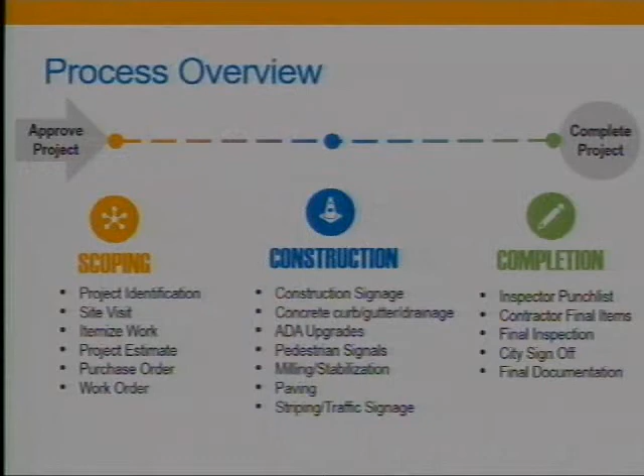We'll keep with the same process overview — we'll have our sliding scale down at the bottom and go through the different phases of construction. The first project I wanted to go over was our Santa Fe project, Southwest 44th to Southwest 29th.

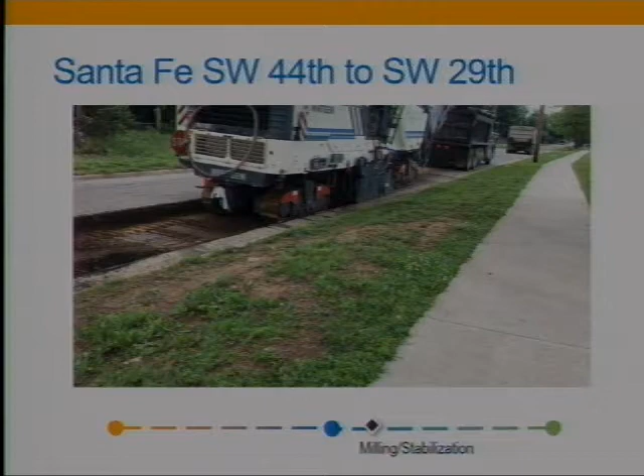Here's a little video of them doing some milling, and you can tell they're taking out a lot more material. Usually we have just a 2-inch mill and overlay, so we take about 2 inches of the top surface — typically that's where all the oxidation and issues have come about. Our intent is to mill that 2 inches off, get into a fresher layer of asphalt, and then overlay that material.

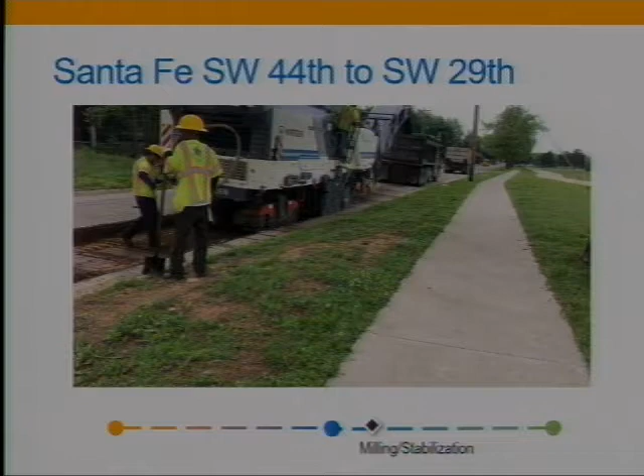In this one, they were doing a full depth patch, and they do that a lot of times. They'll take the mill, and if we've designated that area as a problem area, we'll do a full depth patch, using that full depth mill to go down to get into some better surface, then build that up with asphalt and finish it off with the final layer. So that project is progressing along.

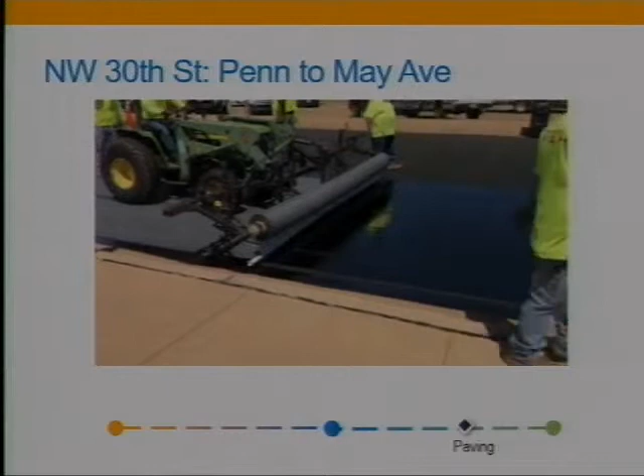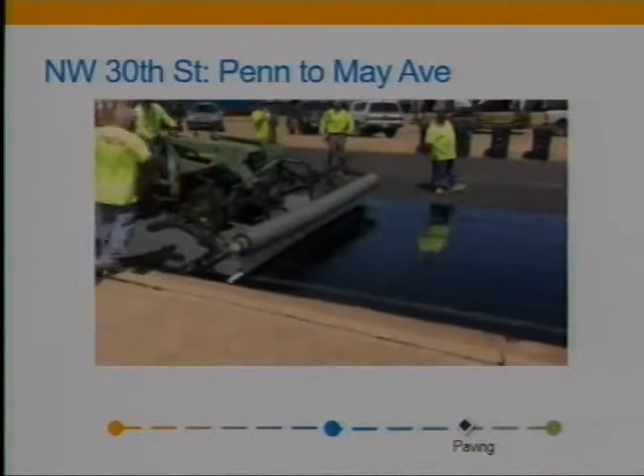Our next project here is Northwest 30th Street, Penn to May. This quick video shows them using an interlayer, a non-woven fabric with a grid in it. A lot of times when we mill off that 2-inch surface and we still see some of the cracks and things going on, we obviously address those cracks.

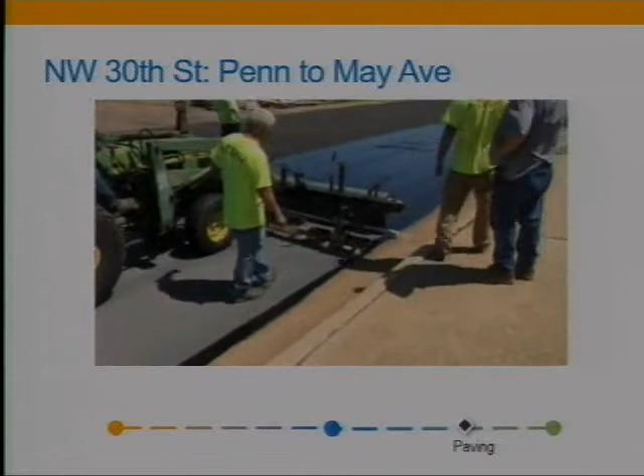If it's a large-scale crack that comes from the bottom all the way to the surface, we'll dig that out and address it like a full-depth patch like we showed in the previous slide. But a lot of times when we still see some of that stuff, we address it with a crack fill material or crack seal material. Sometimes if it's real thin, we'll use a rubberized asphalt to put in there. And if it's large enough, 2 inches or so, we'll actually clean it out and put asphalt material in there.

A lot of times if we feel like we need to, we'll put an interlayer, or this grid system, in between those layers. The main purpose of that is to help with reflective cracking as it comes back up through the surface. It's a great tool that we use quite a bit, and that's what I wanted to show you there.

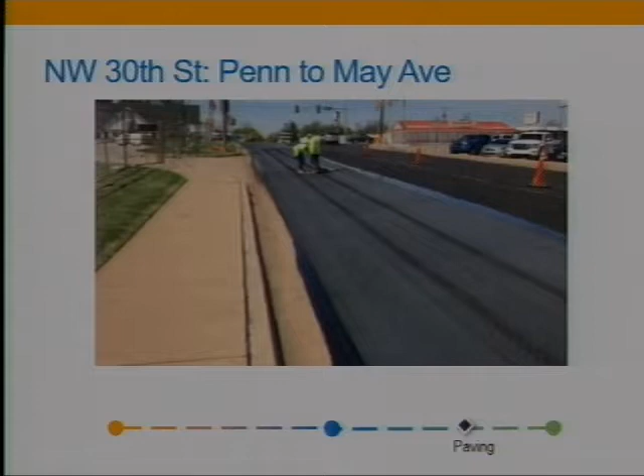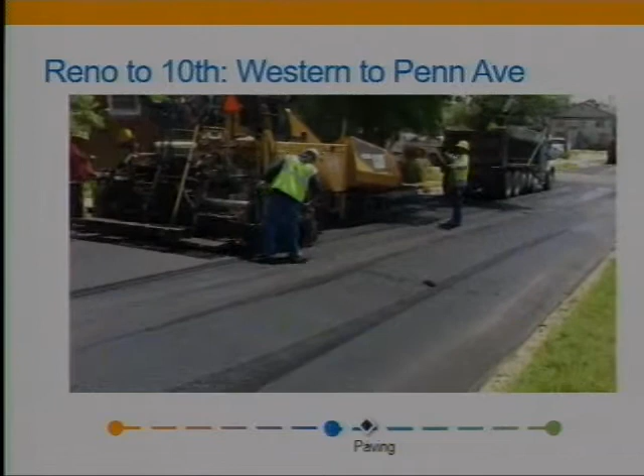Our next slide is one of the residential resurfacings here, Reno to 10th, Western to Penn. This video just shows the grid system. It doesn't have the fabric layer that connects it, it's just the grid, and you can see where they've laid that. It comes in 5-foot strips, so they have to do some overlapping there.

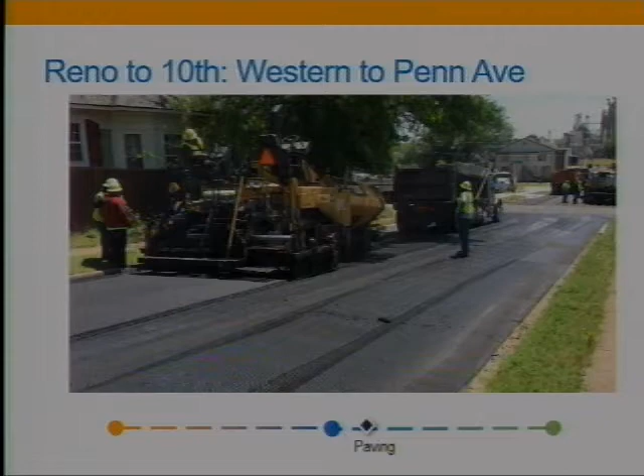This just shows the ease of doing an asphalt overlay on that, and it will help with that reflective cracking coming up through. A lot of times this is a little stiffer material, so most of the times when we use just a grid like this, more times than not, we use that over concrete. If an older street has been overlaid before, when we mill that off and get back down to the exposed concrete, we'll usually do a little leveling course to smooth things out, and put the grid type system over that, which really helps.

Next project is our Southwest 89th Street, Santa Fe to Western. In April, I showed some videos and clips of the concrete, the curb and gutter, and the inlet repairs. It goes to show, the sooner we get that done, the faster we can get to the mill and overlay portion of the project, and this is just a good picture of the finished project. It looks like on that picture we're right there at Santa Fe, looking towards Walker.

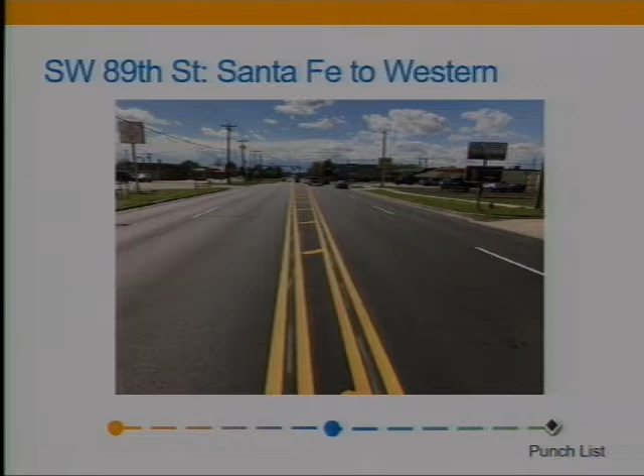My next slide is the Northwest 36th Street from Penn to Western. In previous board meetings I've shown the portion of this project that was the asphalt, the mill and overlay portion through the historical district, and I had always said that it had both concrete and asphalt, so I thought I'd get the picture of the concrete portion here at the approach slab coming towards Western, and I wanted to show that.

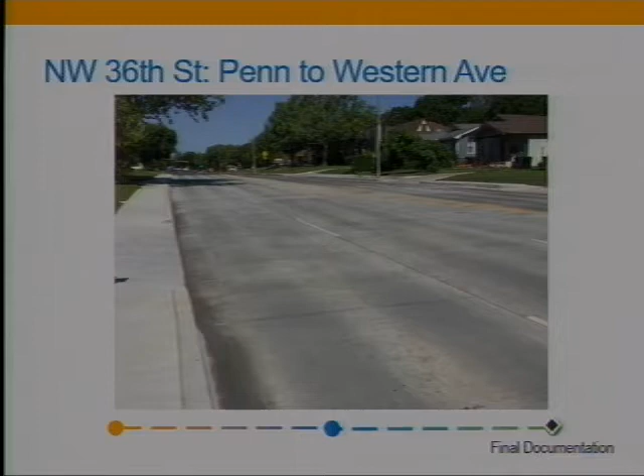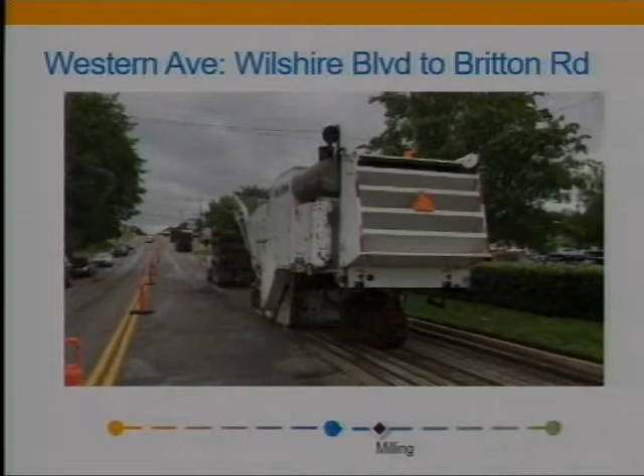Here's a quick video of them milling. It shows the traffic control that's gone on to the left to move all the traffic over to one side. This is one of our larger stretches where we have 3 miles teamed up, going from Wilshire to Britton, Britton to Hefner, and Hefner all the way to 102nd. This is the Wilshire to Britton section, and they are milling on that.

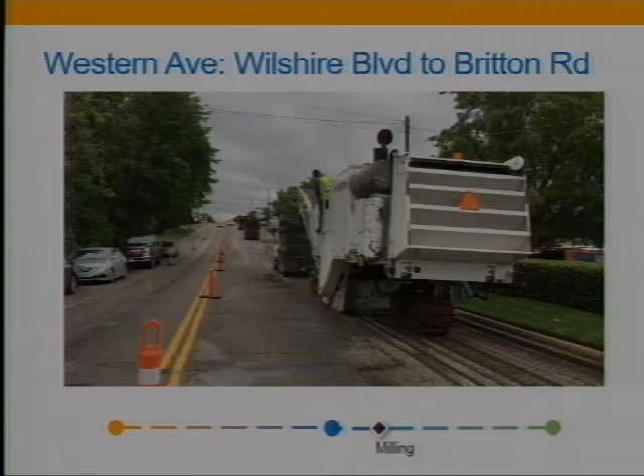Our next slide will show some paving going on. It's just a quick video of the paving.

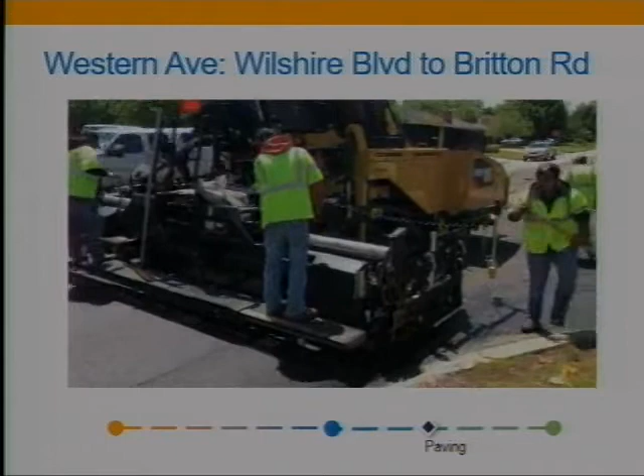Just shows the complexity there. People are scrambling around, moving. It's an intense process, and a lot of times it can become very labor intensive when they do that.

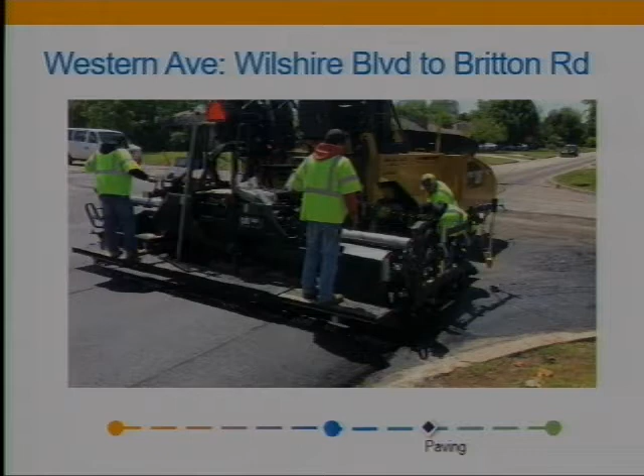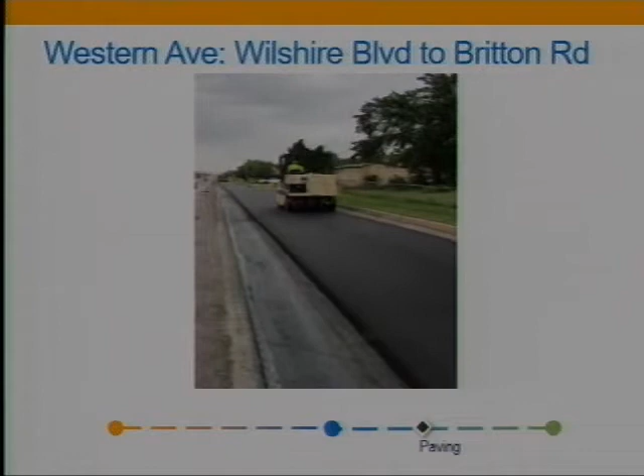We did use the interlayer, and this is just a quick video of them using the pneumatic roller and compacting the asphalt. I really wanted to show that for the interlayer we talked about earlier. We did use that on this one, so it just kind of shows it there.

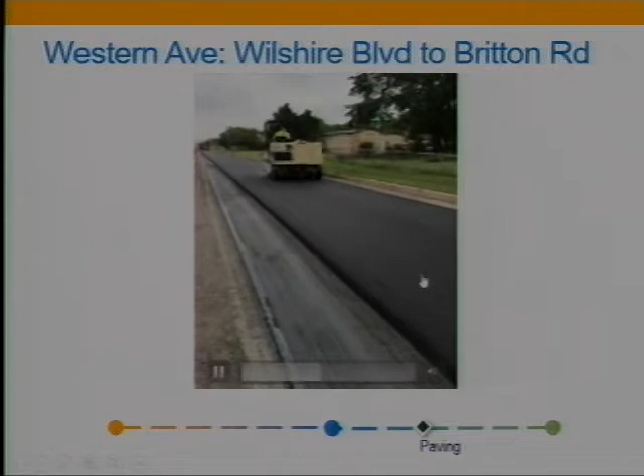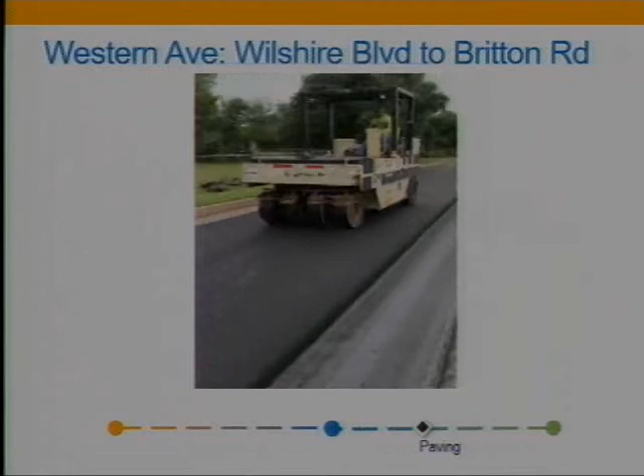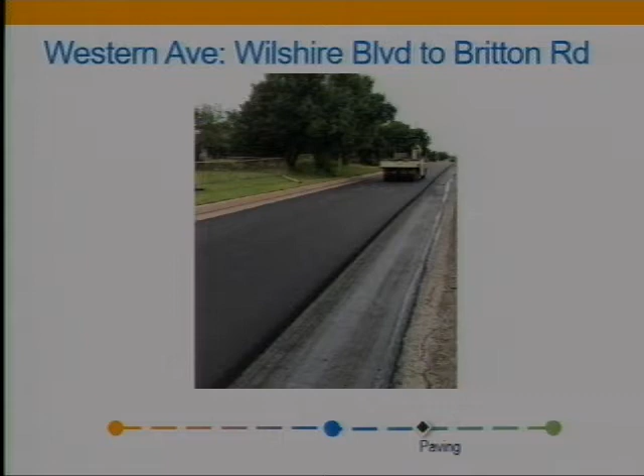It doesn't look like much, but a lot of times they work to get a different pattern. When they lay that asphalt, they work to get different roller patterns because they're trying to reach a 95% density compaction that they have to meet the standards. A lot of times they'll be right at 94%, so they'll change a couple things, and testing labs will come out and work with different rolling patterns. It looks pretty simple, but sometimes they can make it pretty complex.

This is a neat slide. It shows another tool some of the contractors will use. It's a huge help for productivity. They call it an MTV, a material transport vehicle. So instead of the paver accepting the asphalt truck coming in directly, this piece of equipment will catch that truck.

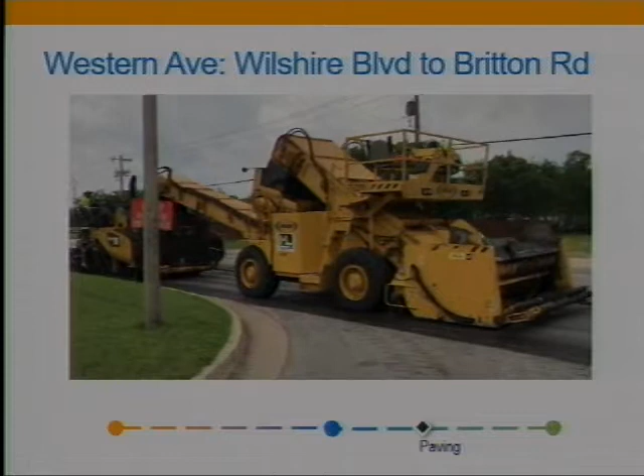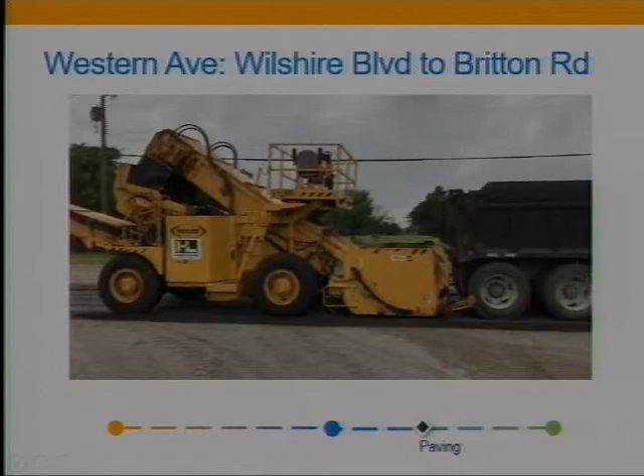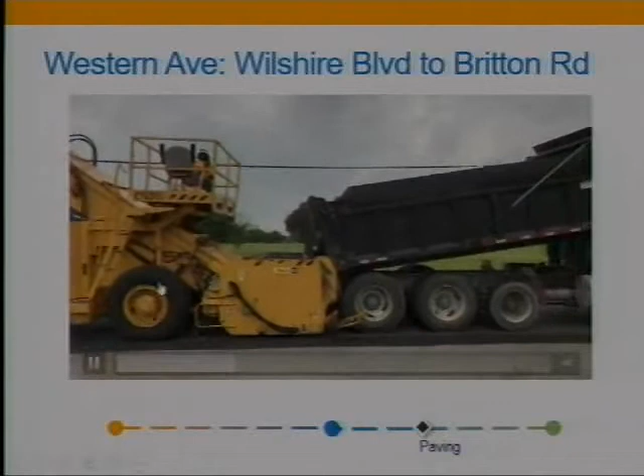The biggest thing is it helps receive that truck and get things moving. It has a larger hopper than most pavers do, so it gets that material in, and it actually has a conveyor that will convey the asphalt into the hopper of the paver. It helps the paver never have to slow down or catch that truck and get that bump. It usually smooths out the asphalt, and it's huge for production when they can do that. If they're able to get that piece of equipment out there, it's kind of expensive, but when they use it, it's a big help for production and really helps with the ride quality.

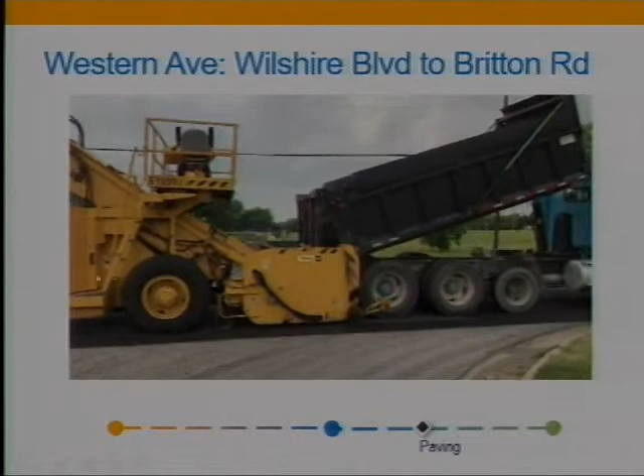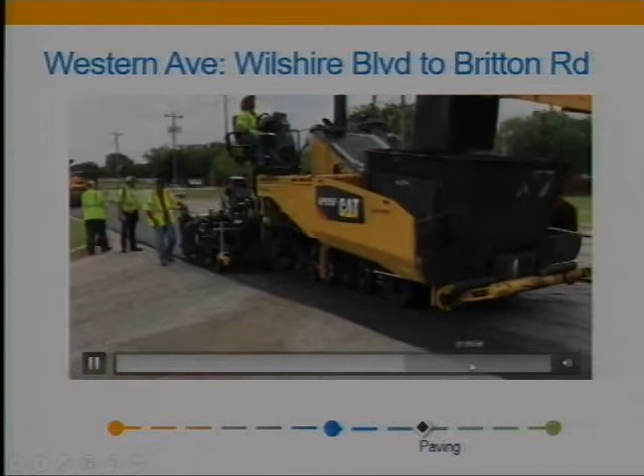It's kind of a long video, but it shows it feeding into the hopper, and then the asphalt pavement machine just keeps moving right along.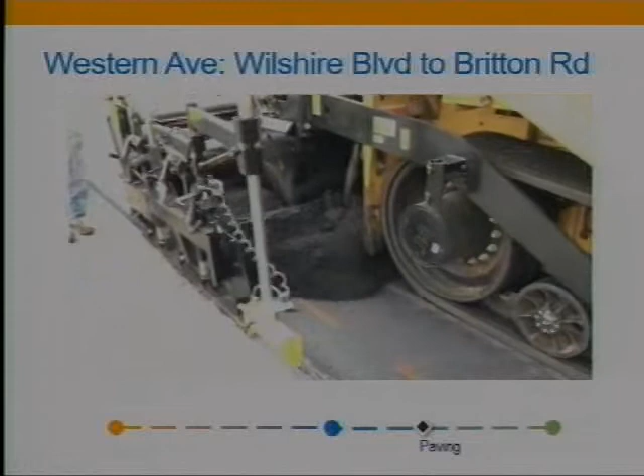Here's another one of our projects that we got started between our last meeting and now. It's the I-240 service road between Penn and Western, both sides of the service road. It shows our typical process: first we do inlet repair and concrete curb and gutter work, then some ADA handicap accessible ramps with the newest pedestrian push buttons that talk to you. That's usually the first step right before the mill and overlay portion.

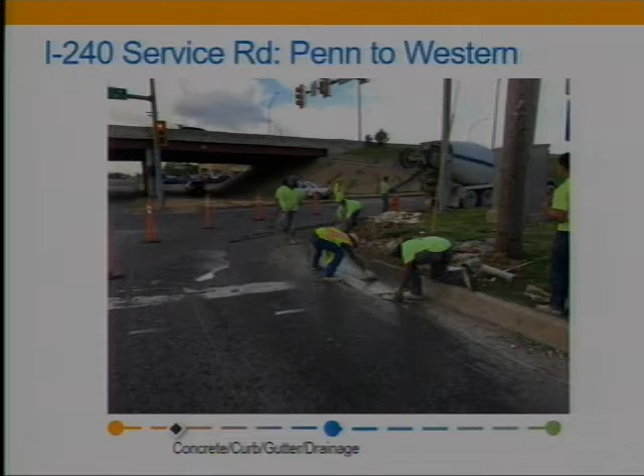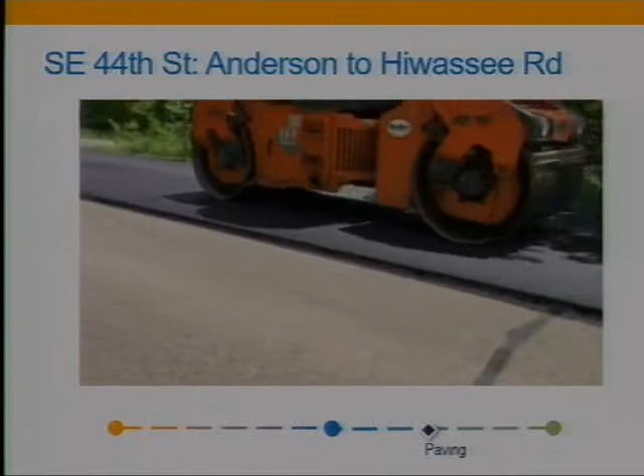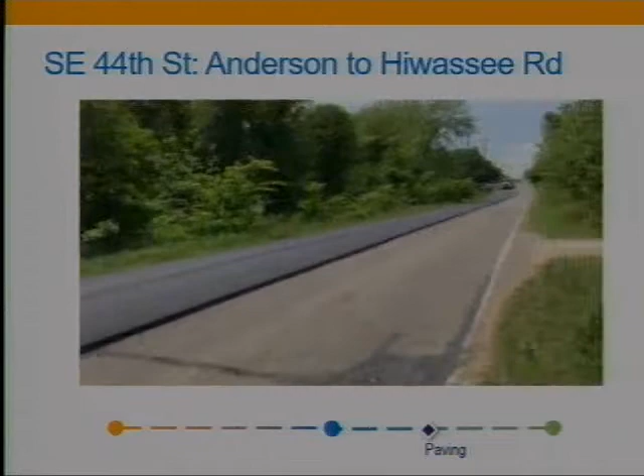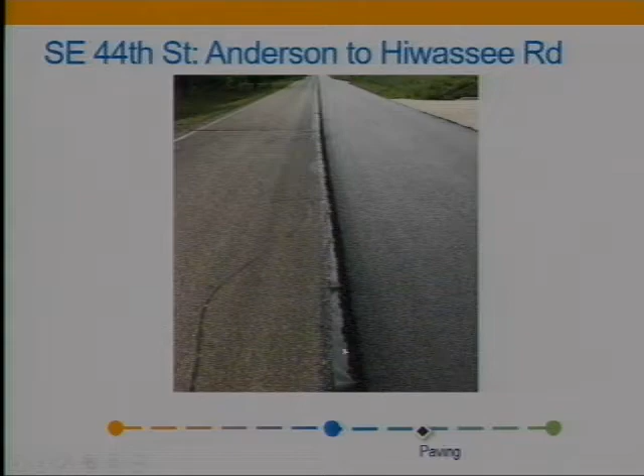Here's another project on that county road where we just did an overlay instead of a mill. I wanted to show Southeast 44th Street, Anderson to Hiawassee. It shows we addressed those cracks with crack seal material, and as long as everything's structurally sound, we'll try to overlay it to add structure. We did use the interlayer—you couldn't really see it in the picture, but it clearly shows that interlayer we used on that road too.

Here's Sterling Canyon, Southeast 164th to Air Depot, another one of our residential resurfacing projects. It shows the gutter work—we call that a ribbon curb. It's a little different than a normal 6-inch barrier curb with the gutter pan; it doesn't have that 6-inch barrier, just the gutter portion, but it really helps confine the asphalt and is good in areas with drainage issues. We try to do as much of that in the neighborhoods as we possibly can.

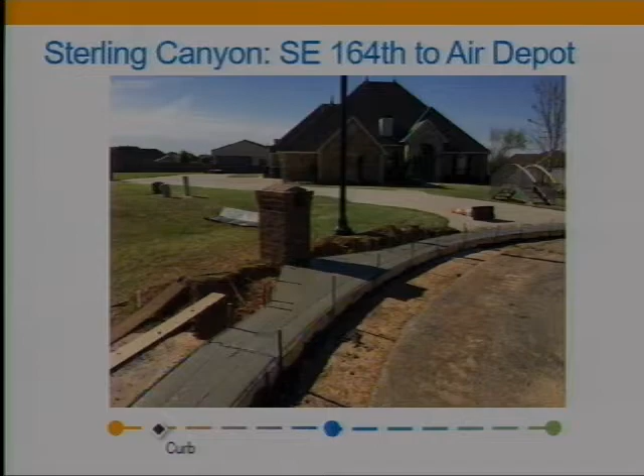And that kind of wraps up my show and tell there. If y'all got any more questions.

Mark, I have a question. You said the City Council has approved 21 of the street resurfacing projects. Correct? Yes, correct. Whenever that project is finished, we have a 1-year maintenance bond that the contractor is responsible for, so we take that to City Council for final acceptance, the final budget, and it also places that 1-year maintenance bond into effect.

For our new board members, would you just briefly go through the 2 types of street projects that we have and how the rating system works? The prioritization method? Yes, sir. Oh, man. Absolutely, no, it's a key process that we have.

We have a pavement management program system, and for us to evaluate that, we try to—with all the streets, there's about 1,300 arterial streets that we have—we plug that into the program and use a prioritization method.

So some of the key things we look at—sorry, it's a complex process, but the main things we're looking for is the ADT, which is the average daily traffic. Some of the rural streets we may have 2,000 to 5,000, but some of the inner more urban streets can have up to 25,000 to 30,000 average daily traffic. That's a key component, because if a street's only seeing 5,000, hopefully it will last a little longer than that street seeing 30,000 average daily traffic.

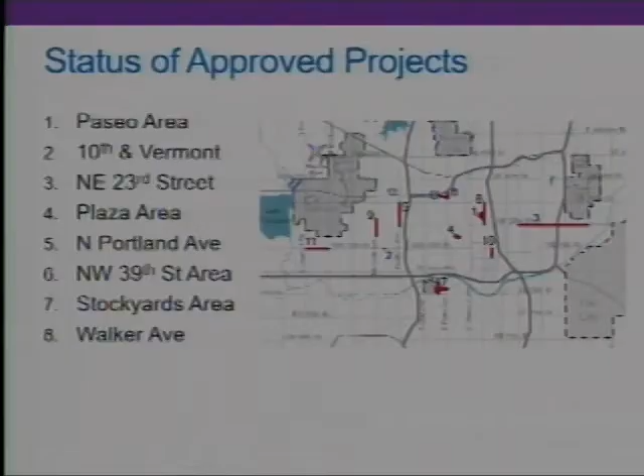The status of these projects: the Paseo project is in negotiations. The 10th and Vermont project, a traffic study is being conducted right now on that project, and CEC is the consultant for that one, and they're on an on-call contract.

The Northeast 23rd Street project is in coordination with the council member, and we're looking at preliminary scoping for that project. The Plaza area project, we are working to coordinate with the Utilities Department on that one. There's a water main through that area, some water utilities that need to be coordinated, so we're slowing that one down and working with them.

The North Portland Avenue project is in negotiations for contract design, and the Northwest 39th Street area project, the design contract with Johnson and Associates is going to council tomorrow.

The Stockyards project is in negotiations also, and the Walker Avenue project is in negotiations. And so the 4 that are in negotiations, the Paseo area project, the Portland project, the Stockyards project, and the Walker Avenue project, those we expect will go to council within the next month.

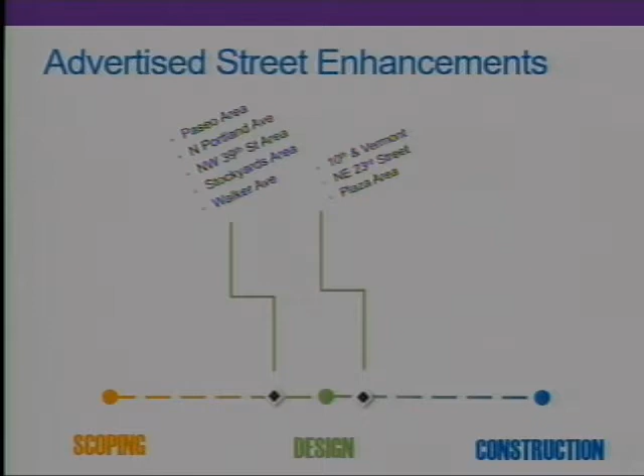And then the Meridian project and the Northwest 10th project have been assigned to Atkins, the on-call consultant, and they're currently generating the proposal of work. And then the Auto Alley project is in preliminary scoping in preparation for advertising.

Are there any questions on the street enhancement projects?

Okay, so next I'll be discussing item 3C, sidewalks status update.

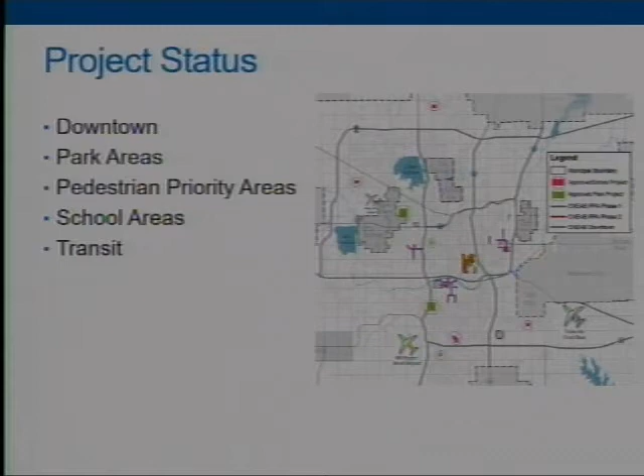Just a reminder, we have identified projects by priority areas as defined out of Bike Walk OKC. The downtown area is a priority area, and then there were parks areas, pedestrian priority areas, school areas, and transit areas identified. CEC is the on-call consultant for these projects, and they've been steadily working.

For the downtown area, just a reminder for our new board members, we allocated $1.2 million, and 100% of that has been approved. These projects are currently in the scoping phase. A list of areas have been identified, and a map has been provided to the consultant for areas for them to focus on, and they're currently reviewing those.

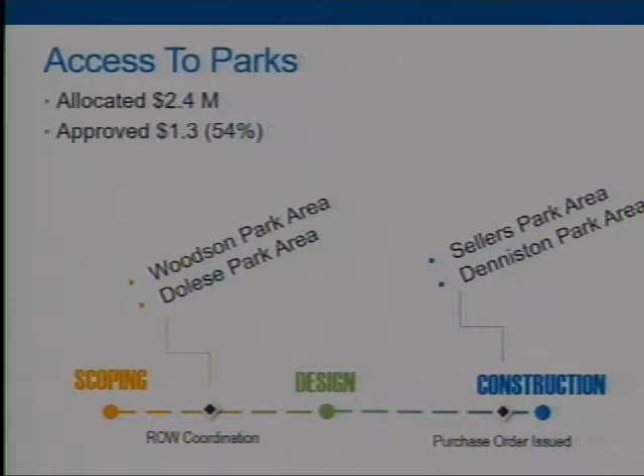Access to parks, we allocated $2.4 million, and about 54% of that has been approved at this time. That includes 18 project locations and about 3.26 miles of sidewalk. Currently, Denniston Park is about 90% complete, and Sellers Park will start once the Denniston Park area has been completed.

And we've got a picture here that Brock will explain. Yeah, we have a little picture here, just wanted to show a few more pictures. Here's Denniston Park, and it shows the complexity - as they take that sidewalk through, one of the big challenges is the driveways, with the cross slope having to be a minimum or maximum of 2% cross slope. Most of the drives we run into are greater than that 2%, so it leaves us having to fix those drives.

This is a good picture because you can kind of see the focus of attention they have on the driveway there. It's shaded in a different area because you can tell he's really trying to focus to maintain that 2% cross slope. So it's a challenge, but it really turns out to be a good product in the end.

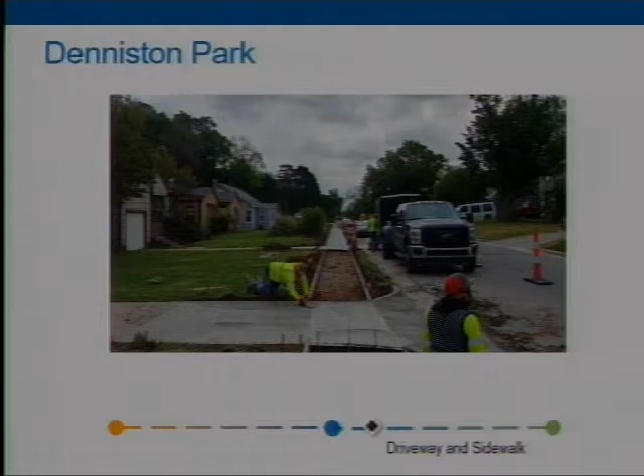For the pedestrian priority areas, we've allocated $14.4 million, and about 54% of that has been approved for 4 different priority areas. Of those 4 areas, it's about 34 project locations, meaning segments of sidewalk that are being proposed to be built.

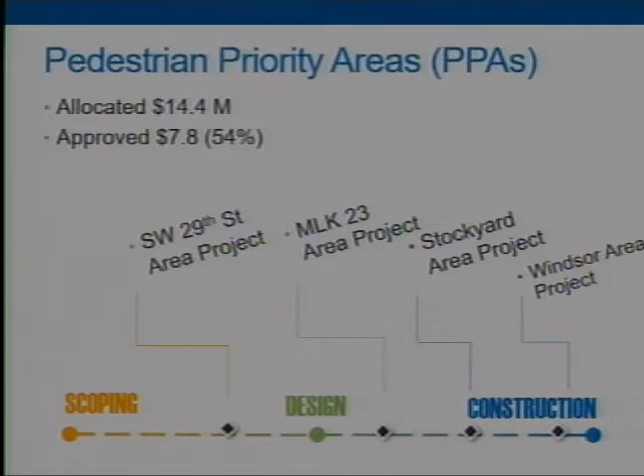For the Windsor area project, it's 60% complete construction. The Stockyards construction was to begin May 28th, and the Southwest 29th area - they're working on the purchase order and the work orders for those.

Here's a quick picture of the Windsor neighborhood. It's the sidewalk that moves along there, and they've actually got a finished product where they have backfilled that sidewalk and got the sod in for all of the disturbed areas.

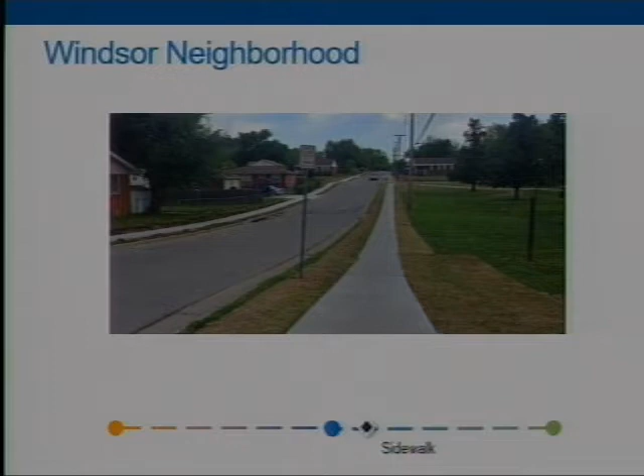They must have caught that before all the rain. But then on the other side, they haven't quite finished. You can see that they've done a driveway on the other side, and they haven't finished backfilling and got that sodded yet. So it's nice to see a good finished product here.

For the access to schools areas, we've allocated $3.6 million, and about 47% of that has been approved, and that includes 17 project locations - again, project locations are segments of sidewalk to be built.

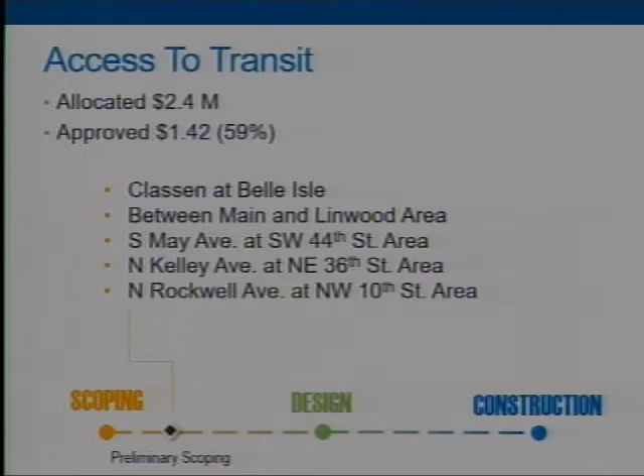And then for access to transit, we allocated $2.4 million, and about 59% of that has been approved by the board. This includes about 10 project locations and an estimated 3.56 miles of sidewalk. This one is in preliminary scope, and the consultant is currently reviewing these locations.

So now I have item 3C, sidewalks, introduce project scope adjustment from Kelly to Prospect. As part of the PPA areas, it was approved to fund Kelly Avenue for sidewalk, and the amount was about $320,000.

Kelly Avenue was recently resurfaced as part of the 2007 bond resurfacing project, and with that, sidewalk was installed at least from 30th Street down to about 27th Street. So the remaining sidewalk that could be built with the sales tax funds would be from 27th Street down to 23rd Street. Public Works has identified additional funds from another funding source that could complete this portion of sidewalk, which has freed up about that $320,000 of sales tax money that had been allocated for this project.

Over the past couple of months, we have received a couple of requests from residents for sidewalk along Prospect Avenue, particularly to connect and provide access for students who attend Thelma Parks Elementary School. Given the proximity of this project and the number of requests we've had, as discussed here as part of the board meeting, we would like to suggest that the available funds of the Kelly project be transferred to the Prospect location.

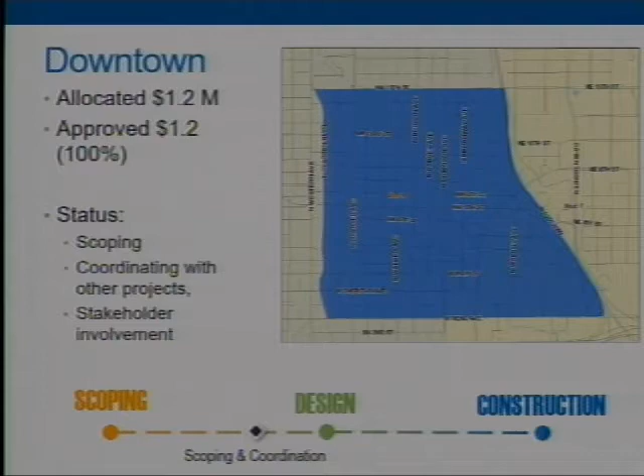As a reminder, there is a transportation alternative program project that was funded prior to this to focus on downtown area sidewalks, and that one is about 60% complete in design. So we're matching that, trying to make up for locations that haven't been caught with those funds, and this project will come back and pick up a lot of those areas.

Thank you. Yeah, it's just such a broad area, and it wasn't like we were having to do all of that. We just have some fill-in of those voids, if you will.

Correct. To add to that, for the benefit of the new members and my own recollection, what I understood from that slide is we're in scoping and coordination. As the scope is determined, we'll see more specific details as far as which locations are identified to be addressed.

I can bring back to you at the next meeting the segments of roads that have been identified and prioritized to be looked at. The consultant is going out and looking, and the goal is to get as far down that list of prioritized segments as this funding allows. We may not be able to achieve all of what has been identified, but that is the goal, and I can bring that back next meeting.

So I appreciate the extra scoping on downtown. I have a 7-month-old, and pushing a stroller around, I'm well aware of the ADA steps that we can still take. So I appreciate that.

One question I did have with regard to the Kelly project, can you elaborate on your outreach methods of interacting with the community on their recommendations? Like how many people did you meet with, and what sort of diversity of meeting times or mediums did you use to get their opinions?

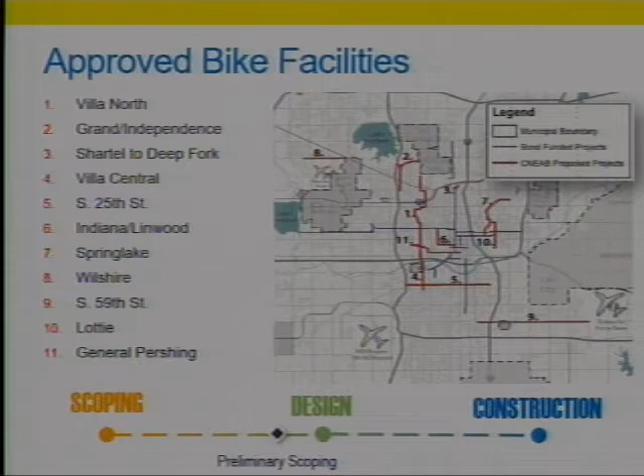The status of these, weekly we meet to work through the design details, and we're setting a precedence going forward with key standards for maximum safety concerns. So this has taken a little bit of time here. We want to make sure we do it right. Some of the challenges we're working through are consistencies for protected bike lanes, on-street parking designs.

Regulations, transitions through intersections, design details of placement of pavement markings and signage frequencies, and working through the cost estimates. Some of these may be changed. They were mostly based on paint and previously did not include conditions for resurfacing. So those are some of the challenges we're currently working through.

And then the status of these, they're all over the place. So here we've got Villa North, Grand Independence, Villa Central, South 25th Street, Wilshire, and South 59th Street. Most of these are on hold for a variety of reasons.

Villa North and Grand Independence are on hold at this time because we're coordinating with the BRT. Both of these projects cross the proposed Northwest BRT, the Northwest Expressway Bus Rapid Transit line, and we're trying to coordinate these projects to make sure we don't get ahead of the game. There are federal requirements we have to meet, and if we build or construct anything before getting authorization, we might not be able to utilize those funds as match for the BRT. So those are on hold for that reason.

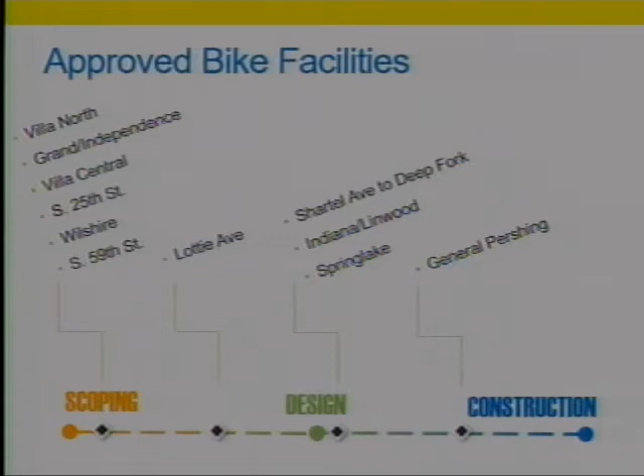And with that, I'm going to turn it over to Brock, and he's going to discuss the General Pershing project a little further.

Yeah, I'll go through just a general overview. This project is probably a little further along in design, and like Lakeisha had said, we're diligently working on our bike design standards, and as we go through this we definitely want to get it right, so we're trying to be diligent on that. But as we get further along, we'll obviously be able to get more projects into construction. As far as design, General Pershing is a little further along than others, but just for the connectivity and all the unique challenges, it was a good example to bring here today.

General Pershing, from May to Penn, it really is General Pershing, and then it turns into Main Street and goes all the way to Lee for our project, approximately 2.5 miles. The unique thing about it is it ties into Lee Avenue, and Project 180 actually took over from Lee all the way to Hudson, where Main Street kind of dead ends to the Devon parking facility.

And so there's some good connectivity there. It will connect the fairgrounds to downtown, and it connects to that Project 180. So it has good connectivity there.

It's very unique because there's a lot of different pavement footprints. As you know, General Pershing is a 4-lane with that divided island. It's creek there, but then it turns into a 4-lane undivided, and it just kind of changes throughout as it moves from May all the way to Lee.

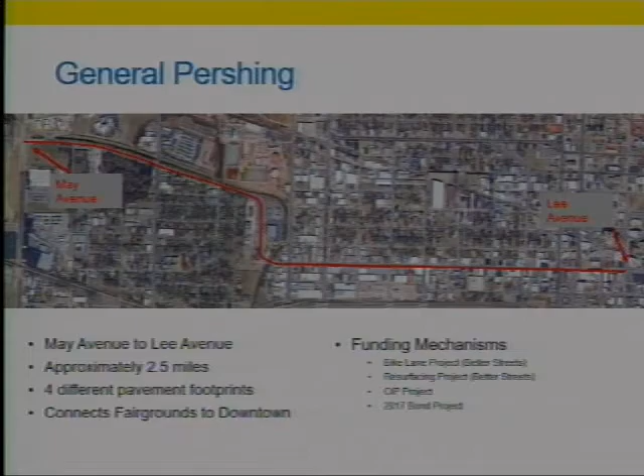Well, that completes the status update of item 3D, bicycle facilities. Any questions? I have one.

Do we know the timeline on BRT? I know that they just did interviews to hire a design consultant, and I believe the whole project needs to be completed by 2023. I don't have any other details in between there.

And so we're tangentially connected to that project, it sounds like. Potentially. We may have an opportunity to move ahead, but we just want to make sure we get that authorization before we do anything on those other projects. So those could potentially get moving sooner, it's just that we want to make sure we get authorization first.

Good, thank you. So I had a similar question around the BRT. It seems like it makes a lot of sense to coordinate. My question is about what the process looks like for the BRT, and in particular what impact that'll have on these resources for bike facilities and other resources we could put into Classen to make it a more complete street.

You were saying in regards to the time frame, and I know there's been a lot of conversation around the city about Classen in particular, and the pedestrian, bicycle and car access around that road. Do you anticipate an opportunity to have that conversation in regards to how these bike facilities and resources would be leveraged or connected to the BRT development?

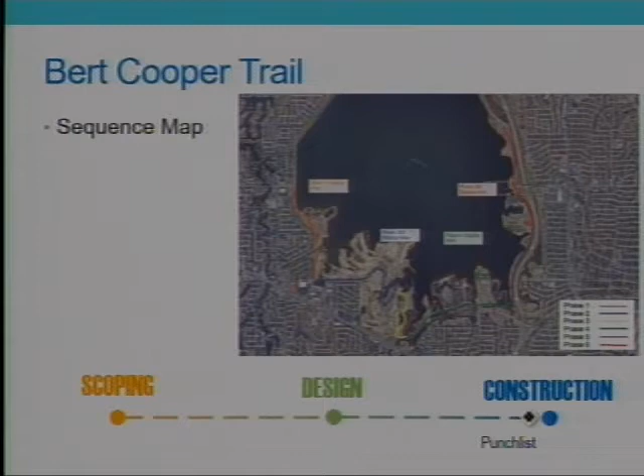I know this was one of the first projects that we actually brought a drone video to you, so we'll do the same thing here. We start on Britton and we're going south. This is right after a rain, so you see a lot of water everywhere, you know, the lake is definitely full. This is an area where those trees, we created a root barrier.

You can see that concrete root barrier there alongside, and so we just kind of move south, and you can see the striping and all the finished product there. This was really about a 12-minute video, but we kind of put it down to 5, and we'll jump and skip through it so it doesn't take too long.

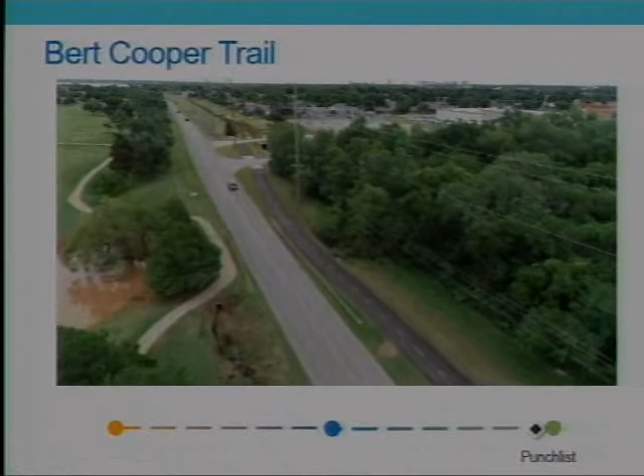It looks like here they've jumped across and they're going down Wilshire, kind of the bottom part of the golf course there, as they move towards the Lake Hefner Parkway. It's really neat to watch these drone videos, it's pretty impressive.

Here we're cruising along, still by the golf course. Here's where some boat storage is, and where they have that boat ramp going into the water. It kind of zooms back, and I guess we see the Stars and Stripes. I think this is over right by the Stars and Stripes.

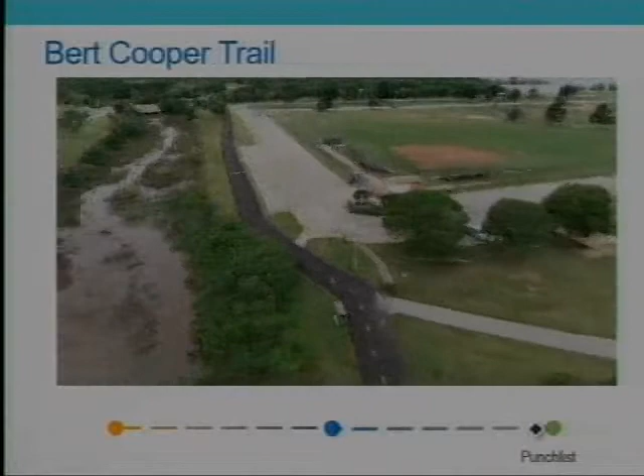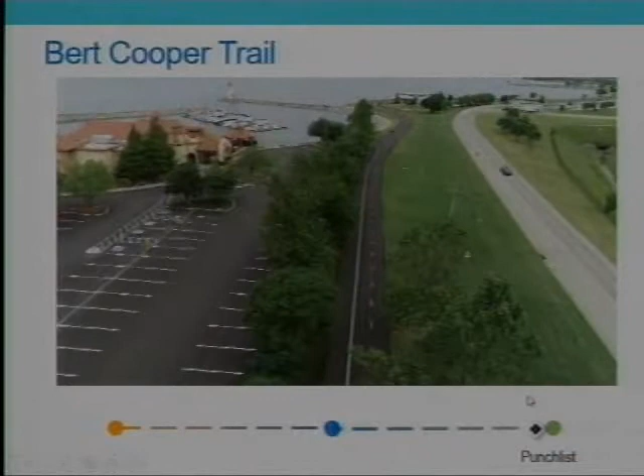You see the baseball fields there as part of the park, and it jumps over here, right here, where it follows the highway. This is over right by the restaurants and stuff. The neat thing about this part of the trail is that there is separation between the walking side and the bicycle side.

And as we get further down, I think we actually get to see some bikers and some pedestrians utilizing the trail. There we go, there's some, it's hard to see, but there's a jogger, and there were some bicycle facilities.

As we go through these trails, there's a lot of coordination with parks and all the events that they have scheduled. We'll do the same with the Lake Overholser and the Lake Overholser Hefner trail that connects the two trails, but I just wanted to bring that back to you and show you a little more drone video. Hopefully, as we move forward, we'll go into some more drone video.

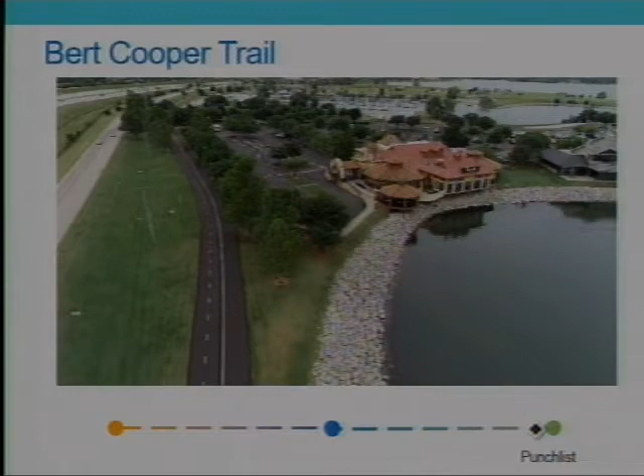And if there's no questions on that, this time I'll turn it over to the Assistant Parks Director and let y'all see some more stuff on Deep Fork.

Can I ask just one hopefully brief question? Where did we land with the signage and wayfinding? We had talked about that some time ago, and I'm asking just because I don't quite remember where we were, but we were trying to make sure that was sort of factored into what we were looking at as we move forward with the trails.

So maybe, yeah, I'll answer that for you, Brock. Melinda McMillan Miller, I'm your Assistant Director for Parks and Recreation, and welcome to the board, both of you. So the Trails Pathway Signage Project is in design right now. We're actually bringing it to the Pathway and Trails Advisory Committee on the next, I believe that's June 13th. Mr. McKnight can confirm that for me.

We'll be taking the revised drawings and some modifications we've made from the originally approved plan back from 2015 for the advisory committee to give us guidance on and approval, and then we'll be moving forward with that design process. But we're about 30% plans at this point in time.

On this project, our sales tax dollars, the first improvements we've done on trails was resurfacing basically the south part of the Bert Cooper trails. Once that's complete, that's the first place we will do this signage package that is almost ready.

We talked early on at some length, and I thought it made a lot of sense that this is an opportunity for us to set a standard so that in future capital improvement pushes, we know that when you do the trails, we also have to do the wayfinding. So I wanted to make sure we were still on that. It sounds like we're in the process, and we'll get a chance to consider that as we look at where we go with trails from here.

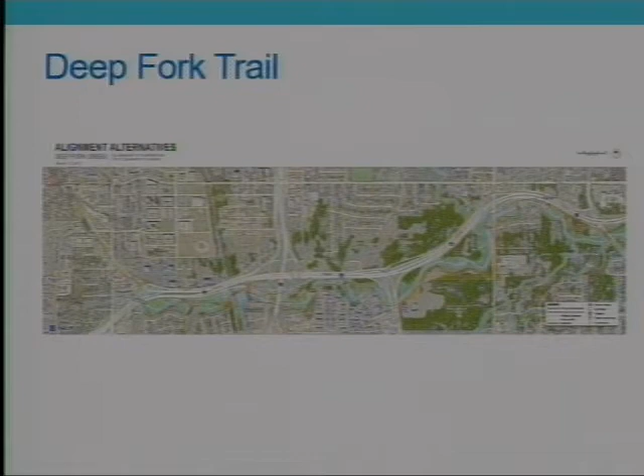One of the next things we're really focusing on and excited about is the connection to Zachary Taylor Park. This is part of that connection that Lakeisha mentioned about connecting to Chartel Avenue and 50th Streets, but really utilizing Zachary Taylor Park as a local neighborhood park.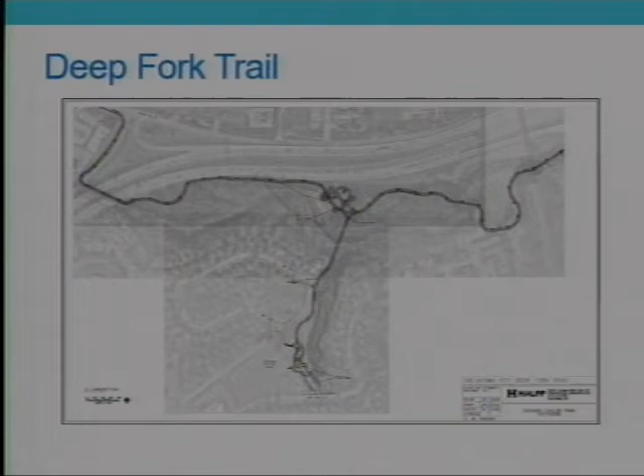It already has an existing parking lot and park amenities, so using both the GO bond funds that we have in place to help enhance that parking lot and some sidewalks, and then using the trails funds to extend a trail through the actual area, right along Aspen Drive back towards those houses, and then connect it back over a bridge to the trail on the north side of Deep Fork Creek. We're really excited about this connection.

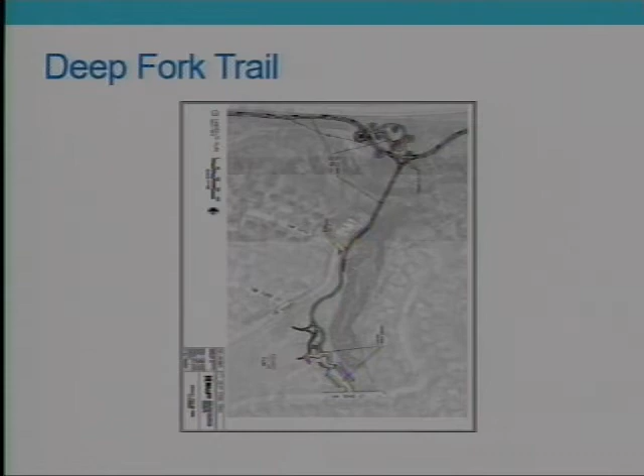It's one of those that will give direct access to all those neighborhoods just south of there. It's also great access for Bishop McGuinness High School, for their cross-country team to run on the trail as part of their athletic training. And then kind of showing that Chartel connection.

So you see the purple line is actually on-street on Aspen Drive. The green off to the top left is the connection point where we think we'll be able to connect it back to the trail itself. And then the green dashed line will be able to spur, come and actually connect to the driveway and parking lot there of Zachary Taylor Park. And then we'll go onto bike lane and shared lanes onto Chartel Avenue, really giving a great, strong connection back into those neighborhoods.

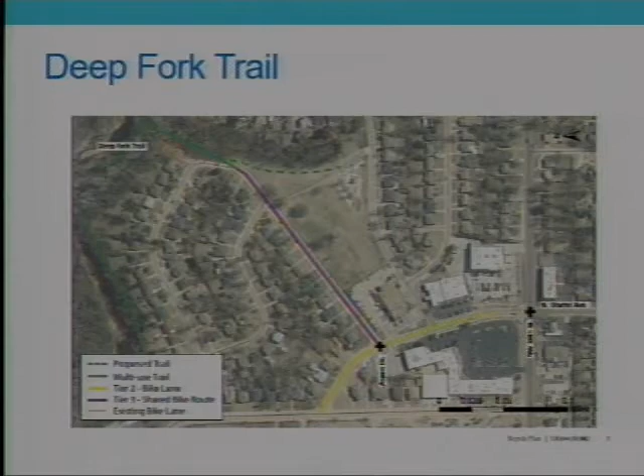It was really important for us for this Deep Fork Trail. There's another location that, even though it's more difficult to connect the trail through a couple spots, we knew that the connection into an apartment complex further east was also an important connection, to bring those communities into that trail and offer them as many recreational opportunities as we could.

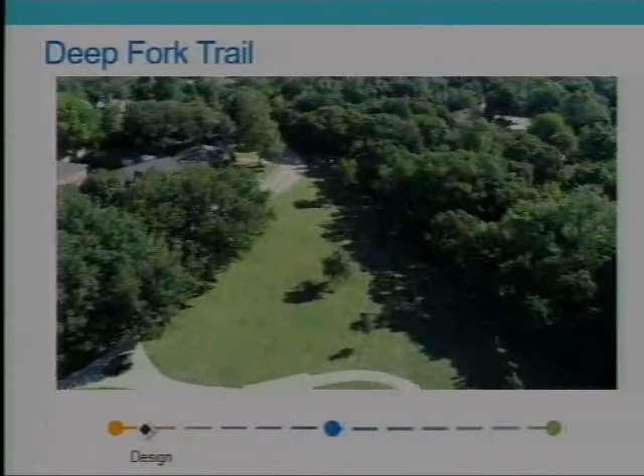So this drone footage kind of flies the direction and the location that the trail will take through Zachary Taylor Park. You can see it's very wooded and densely wooded. We will unfortunately have to take out some trees, but we always like to plant 2 trees for every one we remove.

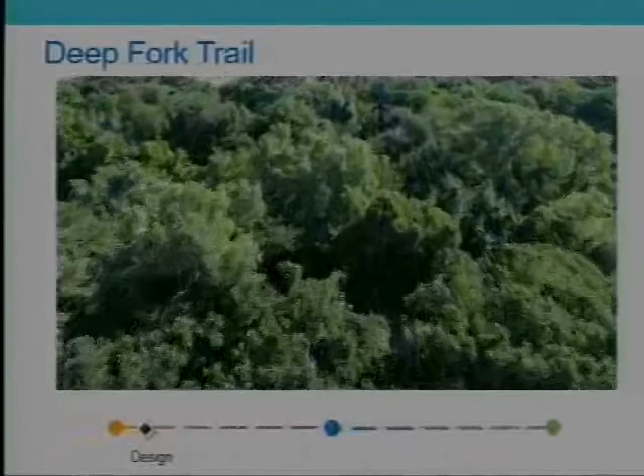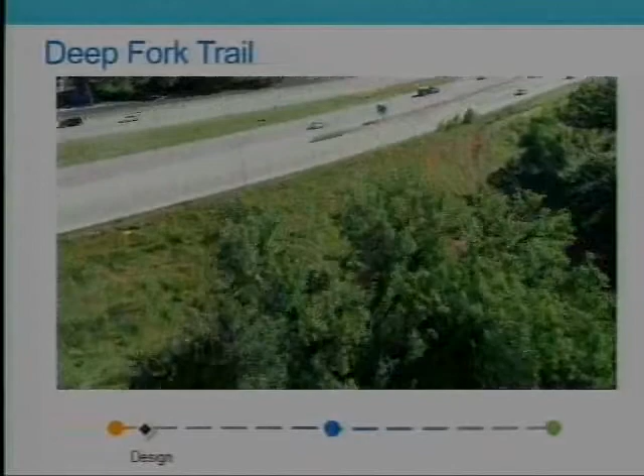It'll go right between these housing developments, and then we'll bridge just over the creek itself, which we're going to fly over here in a second. There's the creek. It'll actually bridge over the creek onto the north side where we hope to add park-like amenities in the future. That'll be a real fun congregating area for families to enjoy.

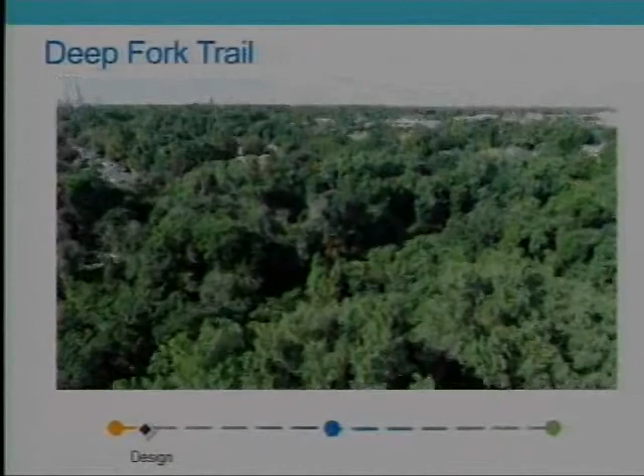So Deep Fork's coming along. It's probably one of our most exciting trails we're working on right now. We have others we're working on, but this one's just kind of my pet project. I'm excited about this one. So, are there any other questions about Deep Fork Trail in general?

The initial master plan for trails in Oklahoma City basically tried to go to all quadrants of the city, doing some sort of wagon wheel pattern. This link has been missing, which will basically run from McGuinness High School going east and connecting to the Katy Trail. It was part of the 2007 bond issue, but funds have come from that and from other sources, and it is hugely necessary to connect our city with the multi-use trail.

Yeah, so it's exciting that this is finally getting done. It's very exciting. And the last piece we're working on to connect that wheel is the Greenway Trail, which is all bond-funded in conjunction with ODOT. Once those two projects are done, we'll have a full circle, so it'll be exciting to work with.

Any other questions for Melinda? One side note, a couple years ago there was a 2017 Go Bond outreach event at Bishop McGuinness, and when I biked there, about 2 miles, I discovered there's not a single bike rack at that high school. Oh, really? Does anybody know of any potential changes to that coming in the future? Not sure, with it being a private high school. Right, and I'm not sure exactly how many kids even ride their bicycles to the high school.

That's definitely something worth looking at. What I can tell you, as I attended Bishop McGuinness, is that the cross-country team will make good use of the trails with that connection, so that part is super exciting. I can't speak to the bike part because when I went to McGuinness I was driving 10 miles a day to get there, but I do think that connection point within the neighborhood itself, and also to the school, will be a big deal. All right, thank you very much.